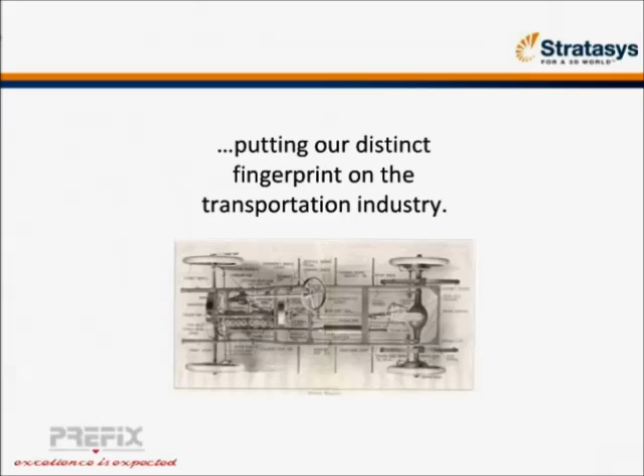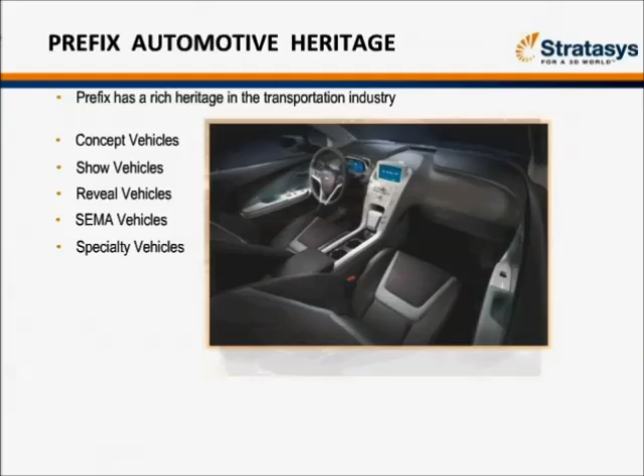With any growing business, you need to learn to adapt to the changing marketplace. For the past decade, we have been heavily involved in what is called subtractive manufacturing through the use of our 6 CNC machines. While this is still an integral part of our business, we found it very important to start entering the field of additive manufacturing through the use of a Connex 500 3D printer. We have numerous uses for this technology in our business that we plan on highlighting throughout our presentation.

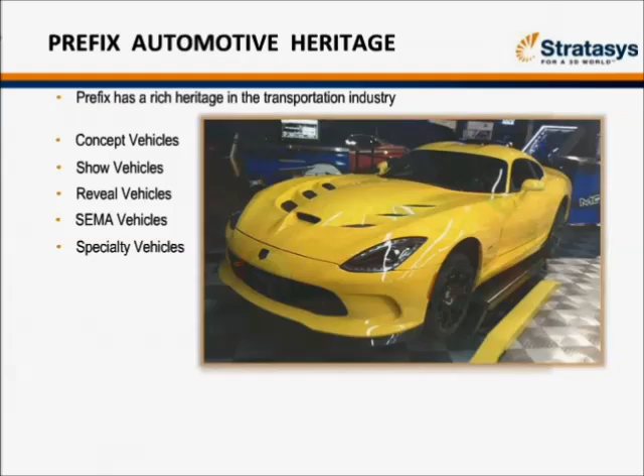We build a variety of models both inside and out, whether it be a new concept vehicle for the North American International Auto Show, an inside-outside show model for an OEM, or a new soon-to-be-released reveal vehicle. We also produce new fun and exciting properties for the annual Specialty Equipment Market Association show in Las Vegas, better known as SEMA.

This past year, we built a 2013 SRT Viper that showcased all of the available Mopar accessories for the car. This included exposed weave carbon fiber spoiler and splitters, carbon fiber interior accents, as well as new seat covers. This was all complemented with our heavy involvement in the SRT Viper program, where we paint all of the exterior body panels. We have also had experience in low-volume production specialty vehicles, such as the Pink Jeep Tour Trekker for Pink Jeep Tours out in Las Vegas.

We built passenger pods for 30 vehicles, as well as made modifications to an existing Dodge Ram pickup truck to make it look more like a Jeep with the traditional 7-slot grille. We have also recently expanded into aerospace through the creation of cockpit and fuselage interior mock-ups for both Gulfstream and Embraer.

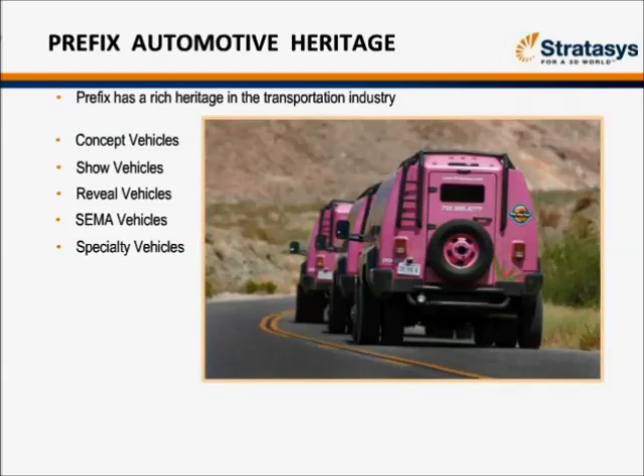While we have a wide variety of capabilities, one that has proven to have a very big wow factor is our interior trim. Back in 2004, we built a custom F-150 for the SEMA show that we badged the Everest. We did a full retrim of the interior, including leather seats, door panels, headliner, instrument panel, and Corian accents throughout. We also did a number of exterior modifications that truly made this truck resemble the luxury automobile market. This vehicle won Best of Show at SEMA that year and really helped catapult us into this type of show quality work.

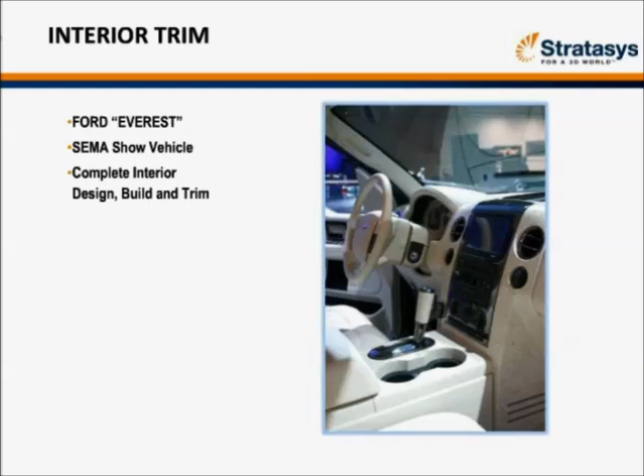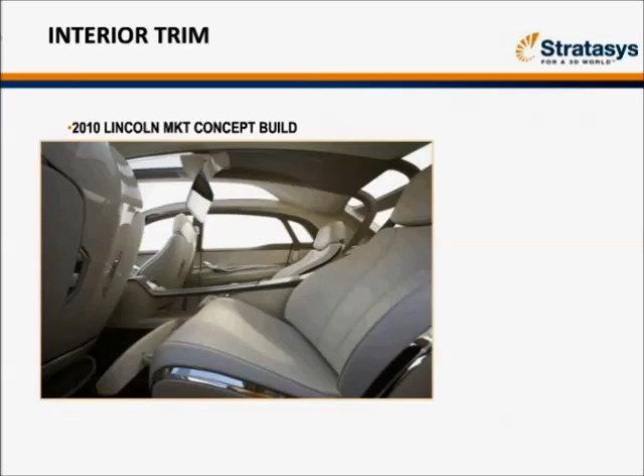Next is the MKT concept car build that we did for the 2008 North American International Auto Show. This vehicle eventually made it into production in 2010. This vehicle was built from the ground up, starting with the driving chassis here at Prefix. This model included some of the highest grade materials, including a banana silk carpet that cost $500 a square foot.

To this day, many people in the industry consider this one of the nicest concept cars ever built.

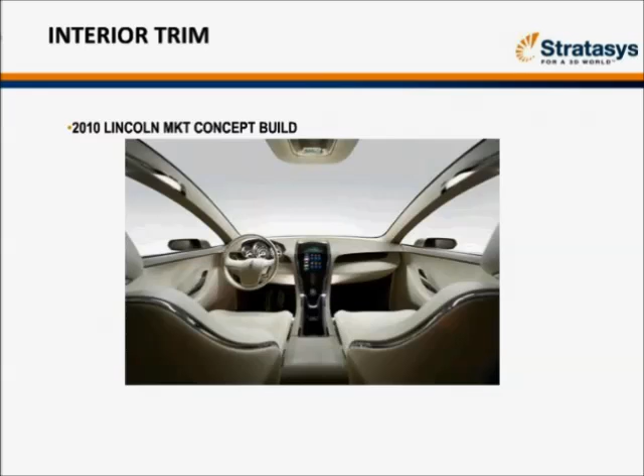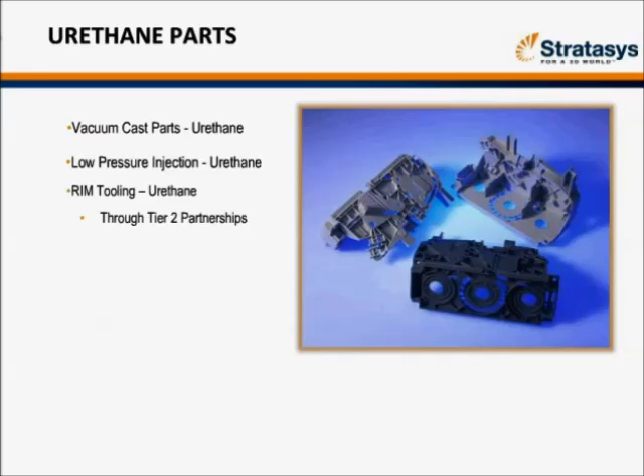Many of the parts that come off of our 3D printer end up being molded in silicone and get cast as urethane parts. We take our 3D printed part, surface it, and pour a silicone mold. Once the mold has cured, we can cast urethane parts in any color imaginable, though most are done clear or red, representative of most headlights and taillights.

We then have to put the casted part that is in the mold into a low-pressure vacuum chamber. This helps to remove any air pockets in the part.

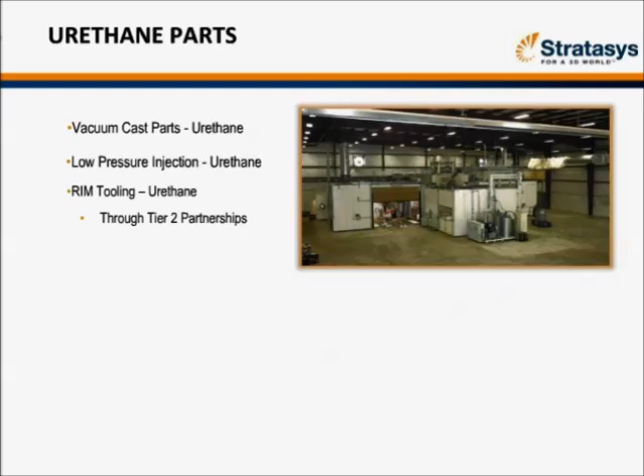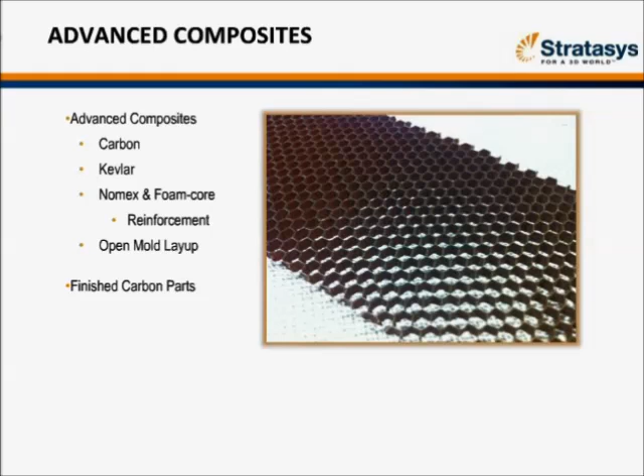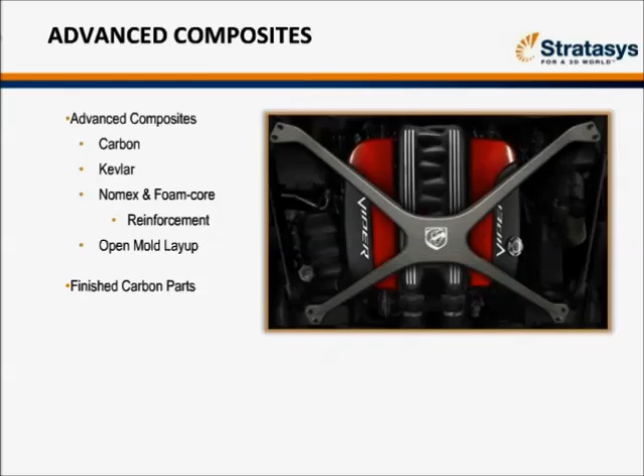When building a prototype, it is often necessary to machine a mold for us to lay up a part that could be any number of materials, including fiberglass and carbon fiber. Most fiberglass work is done through what is called an open layup, where you apply a surface coat to the mold, lay in the fiberglass with the resin, and allow it to cure overnight. You are then able to pop the part out of the mold, trim as necessary, and start the prep work on the part. With the advancements of technology today, the use of carbon fiber is becoming more and more popular, and certain processes have allowed it to be easier and more cost-effective than in the past.

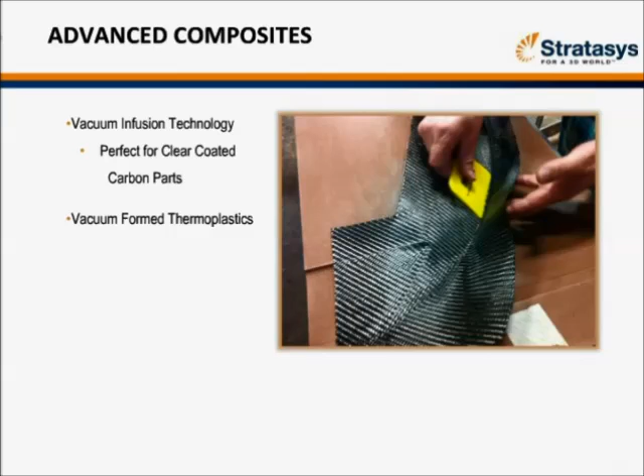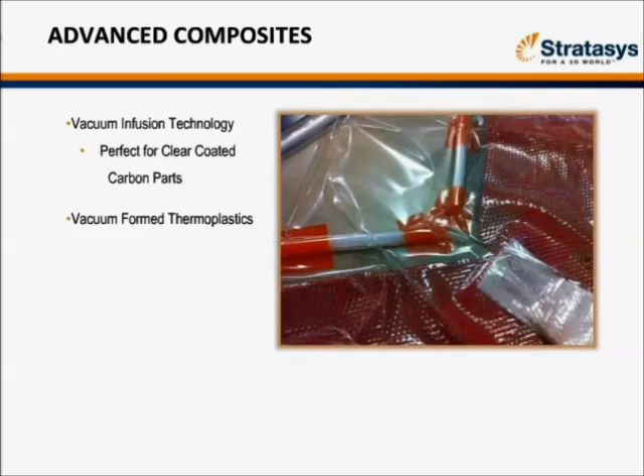If the requirement exists in production, there comes a need to represent it in prototype as well. If the desire is to show the exposed cloth weave of the carbon fiber, we use a vacuum infusion process where you lay the cloth in dry and then suck the resin into the mold through a vacuum system. You are then left with a beautiful part that you can clear coat before installation onto the vehicle.

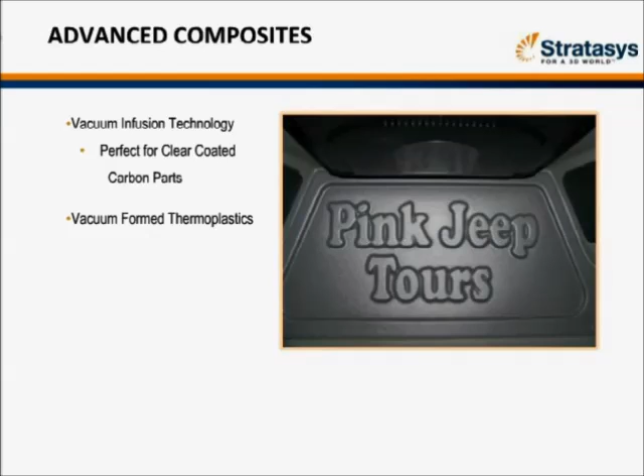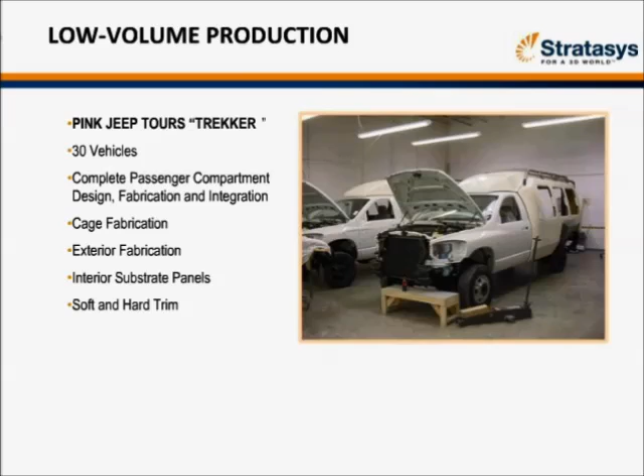As previously mentioned, we built 30 tour trekkers for Pink Jeep Tours in Las Vegas. We were responsible for complete design, cage fabrication, pod creation, mounting, painting, interior trim, and final assembly of each and every vehicle. After nearly 5 years of service, these vehicles are still in use.

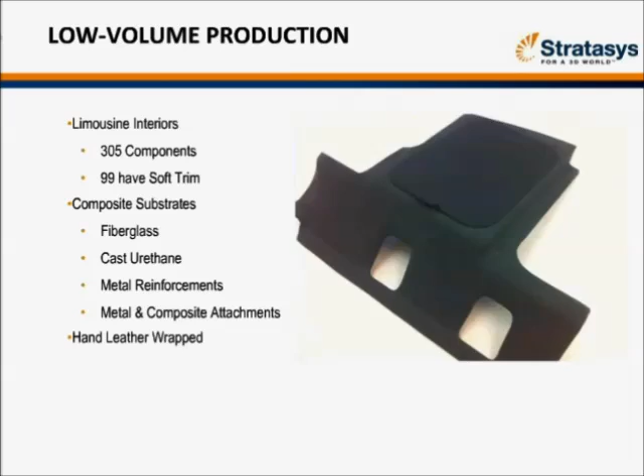We have also had involvement with custom limo interiors that involved the fabrication of fiberglass parts and cast urethane parts, many of which were fully leather wrapped. Many of the panels even included hand-picked, machined, and treated walnut.

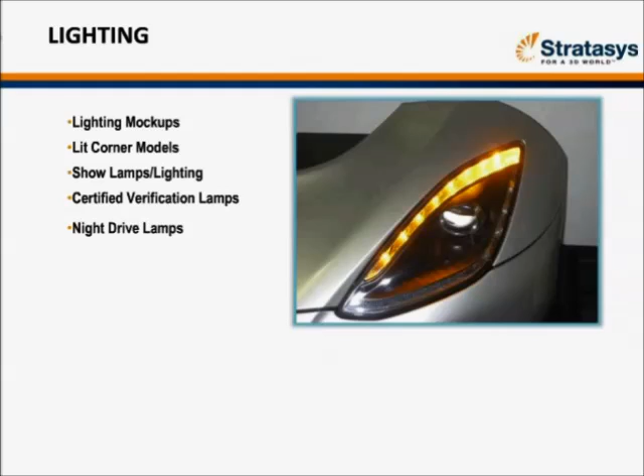Our biggest need for the 3D printer exists in our lighting department. We are a leader in prototype lighting creation and are well known for our attention to detail, as well as our trademark lighting controller. We can build anything from lighting mock-ups, lit corner models, show lamps including interior lighting, certified verification lamps, and night drive lamps. Each of these lamps has a very unique and specific function and requirement.

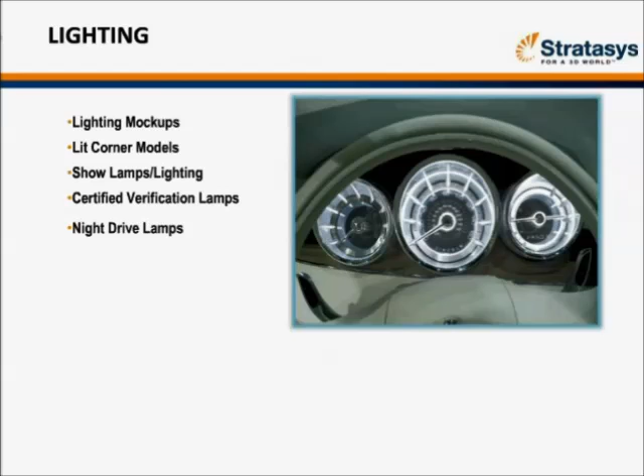Another type of model that we build a lot of are verification models. These can be both interior or exterior models, as well as smaller corner models. Typically, most of the parts of these types of models are machined out of a machining board. However, many parts, due to their size and detail, need to be grown parts, and this is where we get heavy use out of our 3D printer.

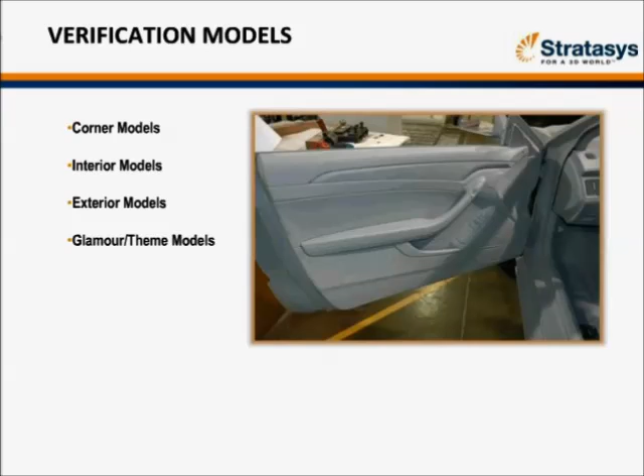Many switches, buttons, handles, etc. may have extensive detail and or be too fragile to machine. Objet provides us the flexibility to create these parts with the necessary detail without as large a risk of breakage or loss of accuracy.

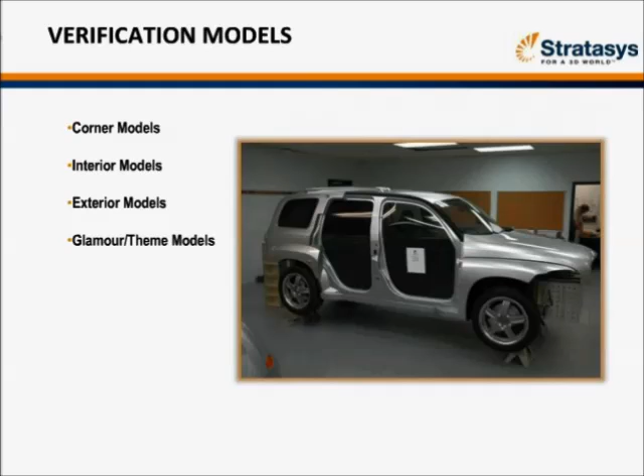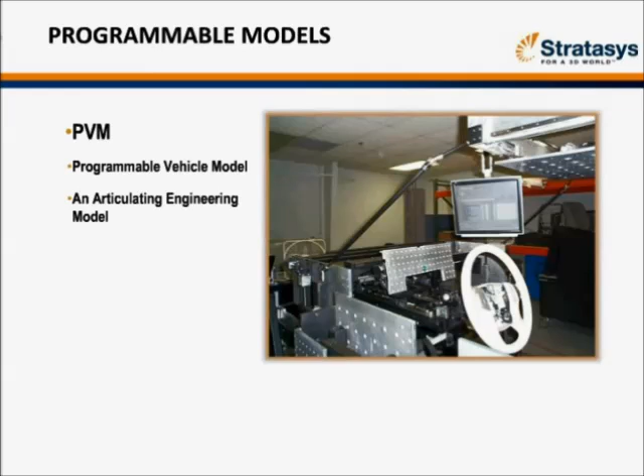Many years ago, we patented what is called a programmable vehicle model, or PVM. For nearly 2 decades, we built these for companies such as Ford, Chrysler, GM, Toyota, and Hyundai to help support customer clinics, where they could assess a wide variety of likes and dislikes from a customer perspective by allowing them to move electronically any of the panels within the vehicle.

You could adjust the seat height, move the instrument panel closer, door panel higher, and roof lower in order to reach your optimal ergonomic environment. This information was then all stored in a database to be studied in greater detail upon completion of the clinic.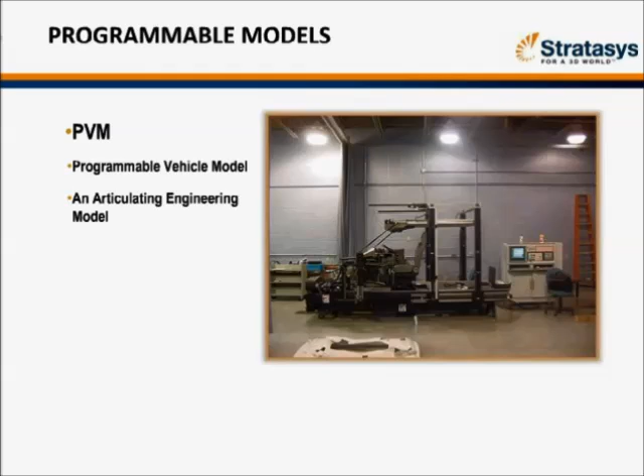We also offer additional program support by use of our FARO laser scanning arm that helps us validate if the parts we machined or grew are to the required build tolerance requested by our customer. We can also do the necessary seat point checks to ensure that the interior seating environment is within spec.

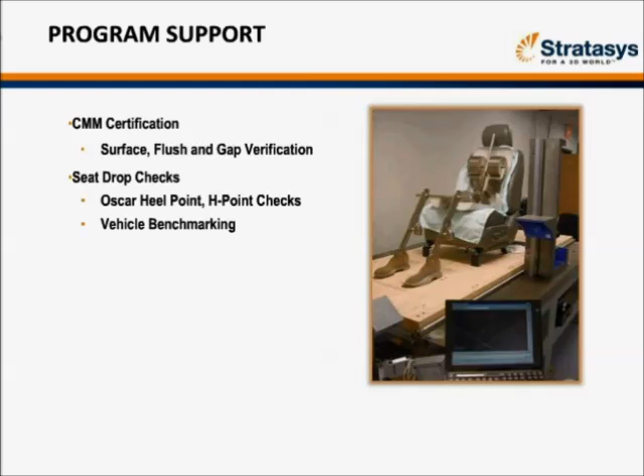Last year, we embarked on a very exciting opportunity to paint the entire SRT Viper in production. We acquired a 130,000 square foot abandoned Kmart, completely renovated it, and turned it into a state-of-the-art facility full of 6 brand new paint booths and all of the necessary equipment to process the nicest paint finish on any vehicle in the world. Every panel is hand-prepped, painted, wet-sanded, and polished before shipping down to the Conner Avenue assembly plant in Detroit, Michigan, where it is built.

We are incredibly proud of our involvement in the SRT Viper program and helping to make this vehicle a success.

Last December, we made our first visit to our local Stratasys sales office to see a demonstration of the Connex 500 in action. We were immediately impressed with the ease of use and quality of parts that were produced. Based on our experience with outsourcing rapid prototype components in the past, we knew how much use we could get out of our own machine.

We did an in-depth financial analysis to determine our potential success. It became clear that purchasing our own machine was the right decision. On January 21st, we officially purchased our machine. During the next month, we did the necessary site preparation, awaiting the arrival of our machine on February 22nd. Based on our internal workload, we knew that we needed to be ready to go right out of the gate. We had an extensive backlog of parts ready to go on our very first day. On February 27th, we launched our first table, and we never looked back.

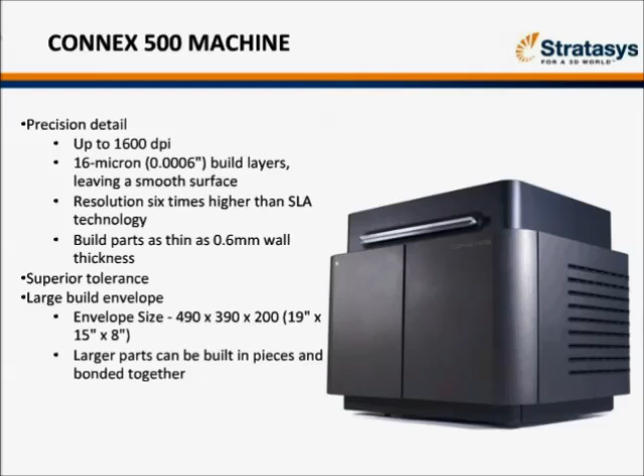In our business, we have multiple projects going on at the same time, run by 6 or 7 different project managers. In order to manage the large number of requests coming from multiple people, we developed a software program database that helps organize all of the part submissions. Project managers are required to submit specifications such as part quantity, due date, material, detail level, and part data.

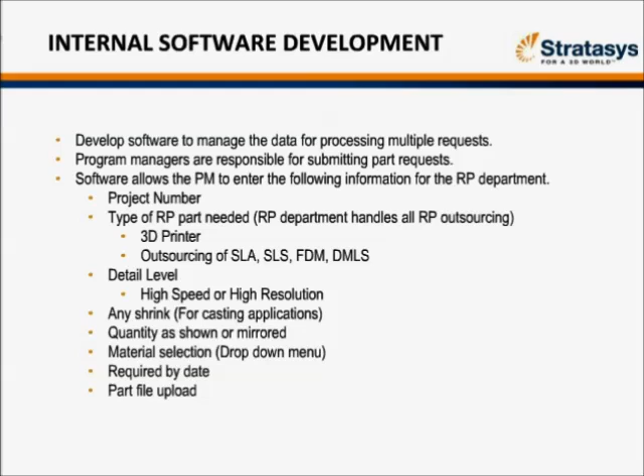This is an example of our user interface for performing part submissions. We have come to realize that without the ability to organize the massive number of part submissions, we never would have been able to be as efficient as we are.

Through the user interface of the complete part submission list, our rapid prototype department is able to sort the results by a variety of categories, including due date, speed requirements, material specifications, project number, etc. This helps to assure that everyone's requests are met.

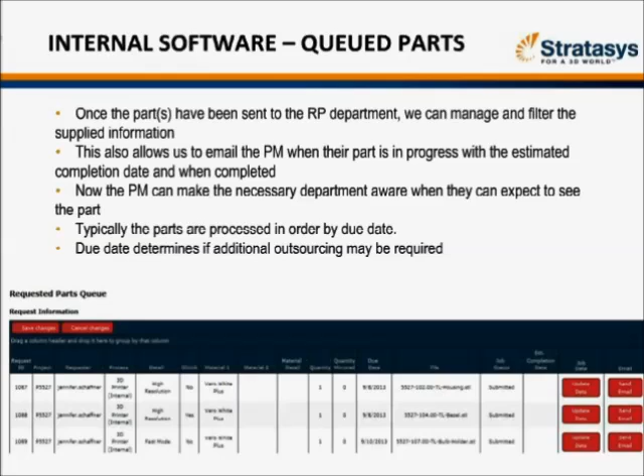In order to be as efficient as possible, there are a number of key procedures that must be in place. First and foremost, it is essential that we have the next table built and ready to go before the completion of the current platform. That way, as soon as the platform ends, we only have to pull the parts, clean the print heads, and start up the next platform. The turnaround time for this is only 15 to 20 minutes.

We have a highly dedicated team that helps support each other to assure that no matter when a platform ends, someone will be available to help get the next platform started. Whether it is 7 p.m. on a Friday, 11 p.m. on a Sunday, or New Year's Day, if we have a platform ready to go, we make sure the machine is running. During our first few months of use, we have operated at 92% efficiency, meaning the machine was running on average just over 22 hours per day. The majority of our downtime was from changing from one platform to the next.

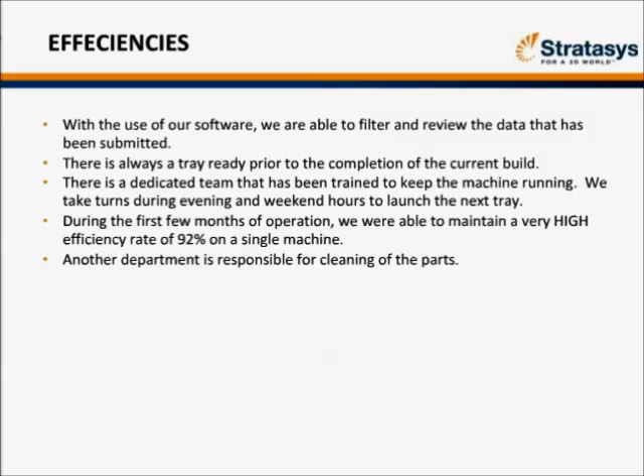As I mentioned previously, the biggest impact of our 3D printer is to our lighting department. Our 3D printed parts are used as our masters to make urethane lenses from a silicone mold. Parts are benched in order to have the highest finish level possible before being molded. Whether the part itself is used in the lamp or the casted urethane part, there are a variety of finishes we can incorporate into the part, including metallization, paint, and graining.

Most of our properties are fully functional with an electronic controller unit that our customers can assess for the first time what their design looks like in real life.

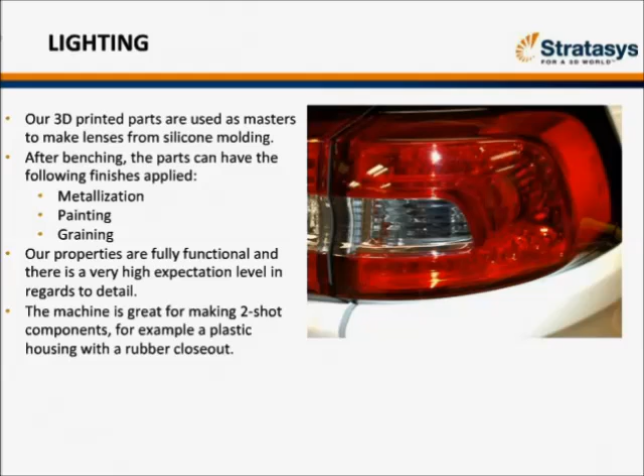We also have a variety of uses on interior properties, such as the one shown. This model was an early run at the 2013 SRT Viper interior. Oftentimes, the components are either too small or too detailed to be able to provide a machined part. In these instances, we rely heavily on our 3D printer to produce these components. These components can be grained, painted, metallized, or wrapped with soft trim.

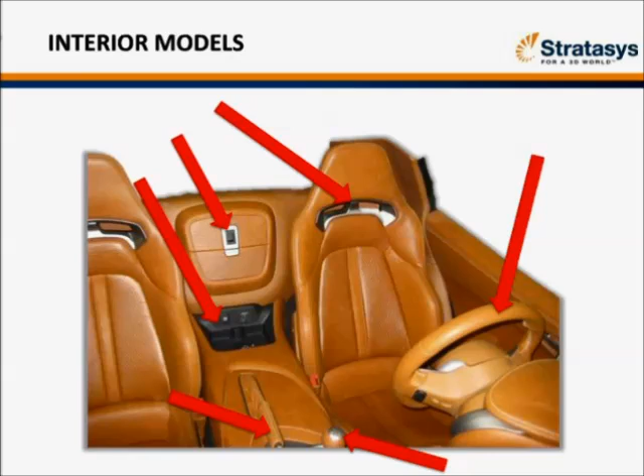The use of our 3D printer has provided additional benefits due to its high level of detail. We have been able to reduce our overall bench time or sanding time by as much as 20%.

As of September 7th, we had put over 4,000 hours on our machine, which puts us on pace to achieve 8,000 hours for the year. To put in perspective, there are 8,760 hours in an entire year, which would keep us at 92% efficiency. This is roughly 2.5 times that of a standard high-end user.

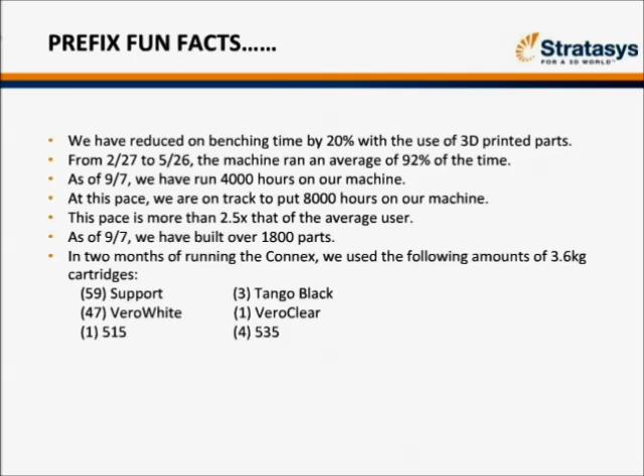In that same time frame, we have built over 1,800 parts and used 115 cartridges. We'd like to thank Stratasys for all of their support over our first 6 months of operation and helping us to be as efficient as we've been.

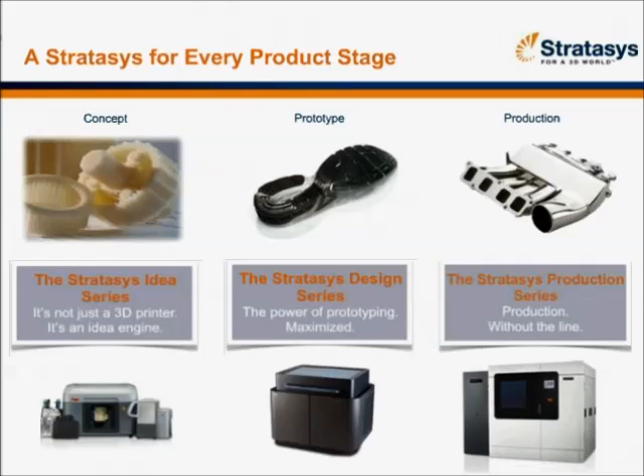The use of Stratasys technology in the rapid prototyping or additive manufacturing industry is truly creating new options for companies and individuals, such as what we heard at Prefix, but it's creating new opportunities on how things are made, how people and teams work, and directly impacting lives through such things as custom prosthetics, for example.

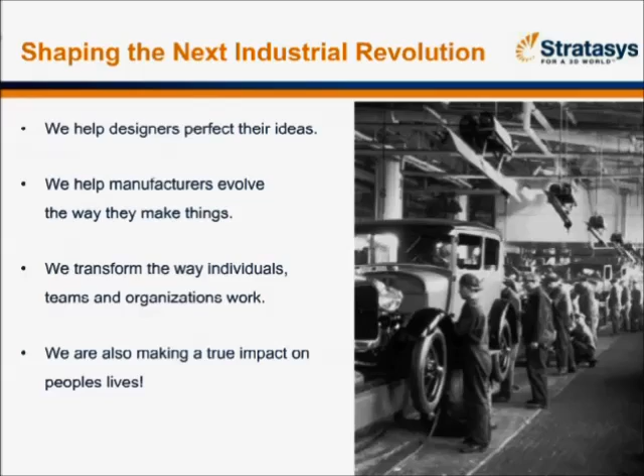So we hear phrases such as rapid prototyping, 3D printing, additive manufacturing. These changes in the naming are all valid, but it's all grown as the industry has grown and as the applications have grown.

So the success of 3D printing does not lie in the replacement of traditional manufacturing methods, but rather as an enhanced enabling technology that plays an exciting role in modifying consumer behavior as far as helping bridge ideas to life and expanding manufacturing offerings.

Fundamentally, we believe that 3D printing is changing the world of product development and manufacturing and creating new opportunities and applications.

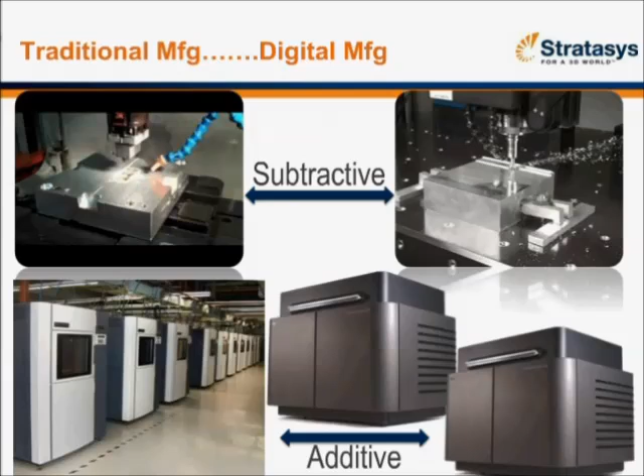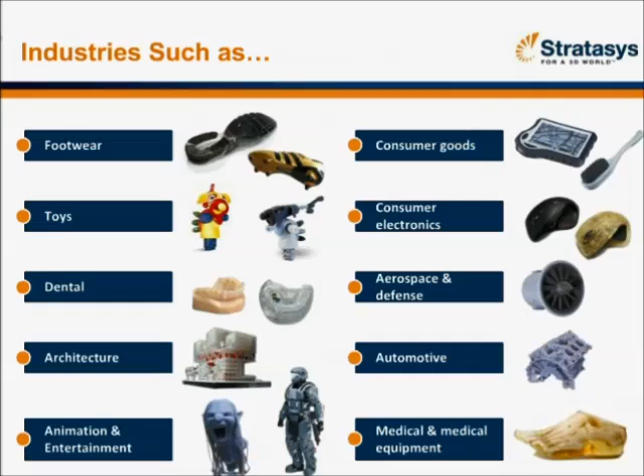So I'm really calling it a 3D printing revolution. The reason being is not only are we seeing the expansion into many different applications and industries, but it's starting to become mainstream.

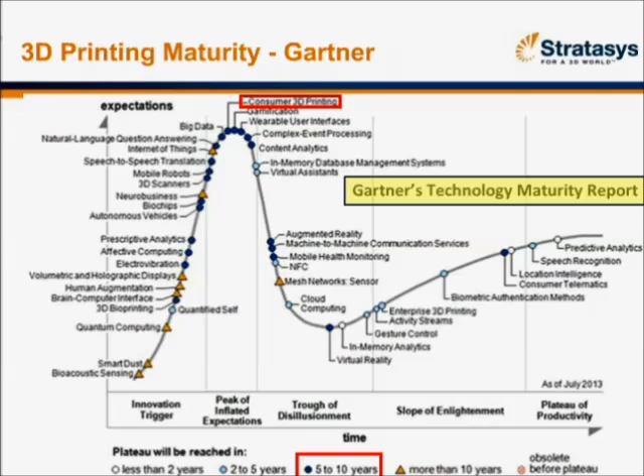So if you look at the Gartner Technology Maturity Report, you can see at the very top I've outlined or highlighted the consumer 3D products or printers at the very top of the peak there. This indicates that within 5 to 10 years, 3D printing or additive manufacturing is going to be considered mainstream in the way that we do things.

So as we heard with Eric's presentation, composite materials are used in aerospace, automotive, sporting goods, and consumer goods because their strength to weight ratio exceeds any other known materials.

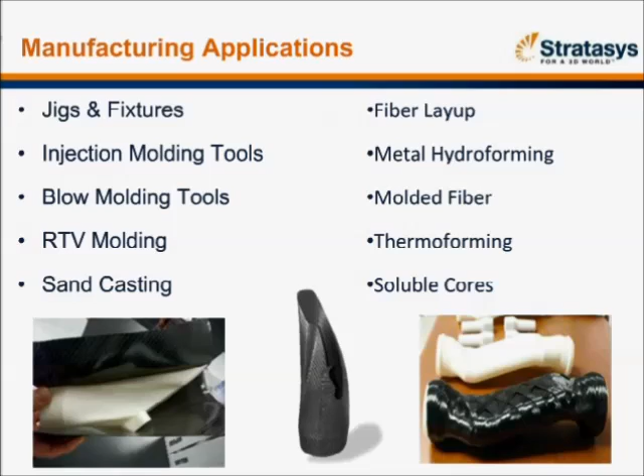Another manufacturing application that lends itself well to either FDM or PolyJet is jigs and fixtures, which are production tools used to accurately manufacture, duplicate, and interchange parts. They can also be used for external components to facilitate handling, calibration, and simulations of specific actions.

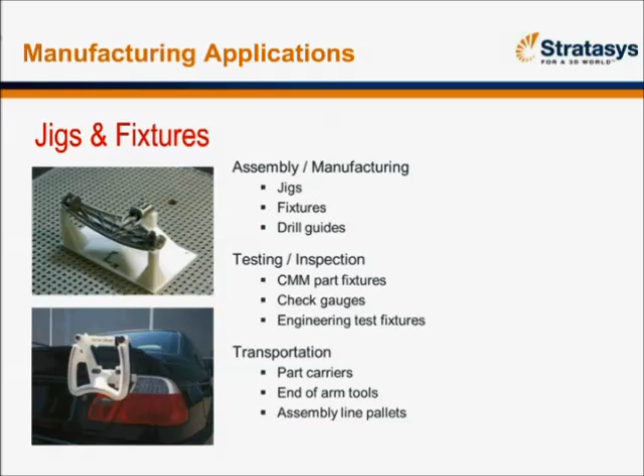FDM parts can be sparse-filled on the inside, making them lighter in weight, and because they're true thermoplastics, they're incredibly durable, which makes them perfect for this application. Some areas that benefit from FDM jigs and fixtures are ergonomics, such as technician comfort and ease of use, easy access and storage, custom design, and you can revise parts as needed. It's a streamlined process, not having to create detailed drawings for the jig and fixture.

Additionally, one of the more popular applications today, growing among our customers, is creating digital ABS injection molding tools. If the over 130 materials we offer don't provide the material properties you're looking for, you can simply create an injection molding tool to produce a short number of final production injection molded parts. PolyJet lends itself well for this process, and you can see some examples here with intricate detailing.

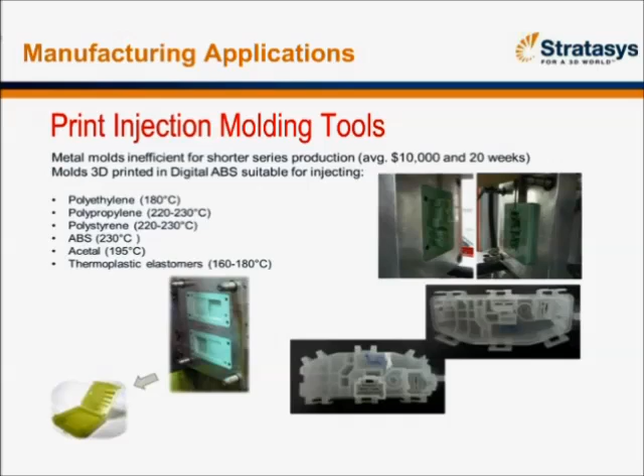When we dive into the core technology behind Stratasys, the first I'll talk about is PolyJet. PolyJet is all about jetting thin layers of material down to 16 microns of acrylic-based photopolymers. That's what allows us to create parts with fine details, smooth surface finishes, and accuracy by jetting two materials at the same time.

We also enjoy the FDM technology with its true thermoplastics that are deposited—this is not about simulated or first-generation plastics, this is about true thermoplastic. It's filament material advanced up to the extrusion head, heated and extruded out at 7 or 10 thousandths of a layer, for instance, to create a robust part. Both technologies are complementary and mainstream in engineering prototyping, but also product development and additive manufacturing processes.

To take a closer look at what's possible, what I call the fuel, let's look at the PolyJet photopolymer materials first: rigid, opaque, clear, transparent, high temperature, digital ABS. Next, there's flexible materials, which provide an array of shore values just from the base material. We also have medical-grade materials that are biocompatible for dental and hearing aids, carrying ISO 10993 and USP Class 6 certification. This is a strong offering.

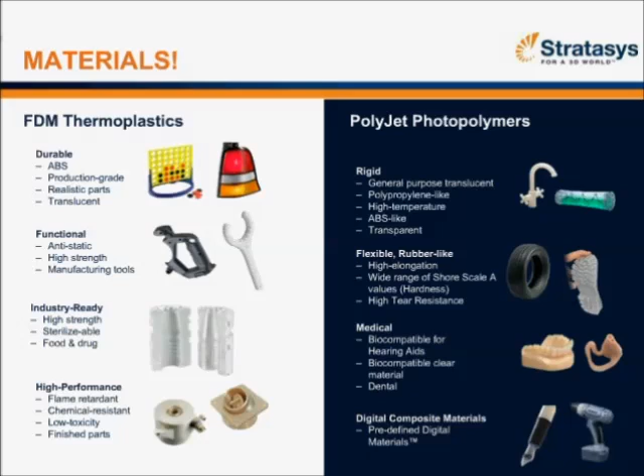So now let's look at the plastic pyramid. Here you can see the different categories: on the very bottom is represented the standard plastics, in the middle is engineering grade, and at the top is high performance plastics.

Today, annual consumption of plastics, believe it or not, is at 300 million tons, and looking back to 1950, the annual consumption of plastics was at 5 million tons. Now we're talking about 17,000 different types of plastics that make up this usage. So plastics is definitely a success story in and of itself. As you see in this pyramid, as you go up, the higher performance tier has greater thermal, mechanical, and toughness properties. This really has been our roadmap, and plastics is just growing beyond belief.

So this roadmap gives us the direction for material development, which we're always striving to get greater overall properties across each of our platforms. Up at the top of the pyramid, we see the high performance offered by Ultem, and in the middle the polycarbonate falls, as well as the digital ABS and all of the others in the standard plastics category. So it's a good offering of materials, well balanced.

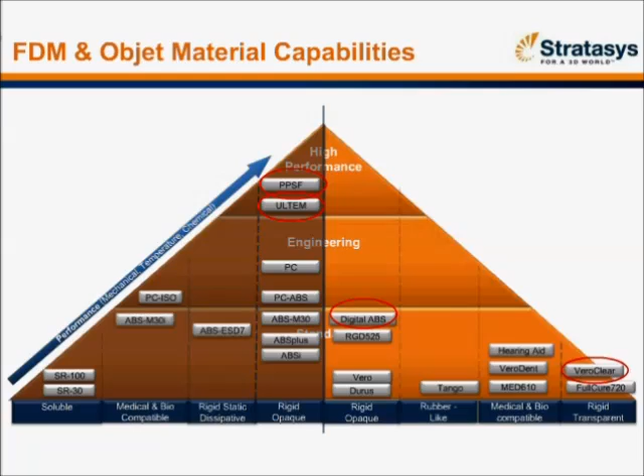Now this is the thermoplastics broken down specifically for the FDM side. I've circled the PPSF and the Ultem. The Ultem has an FST rating, so flame, smoke, and toxicity, which lends itself well for some higher temperature applications. And the PPSF is chemically resistant to gasoline, motor oil, and transmission fluid, for example, and there's a whole laundry list of things that it's resistant to. So these are the two, as well as many others listed here, but these two I'd like to point out specifically for the automotive industry.

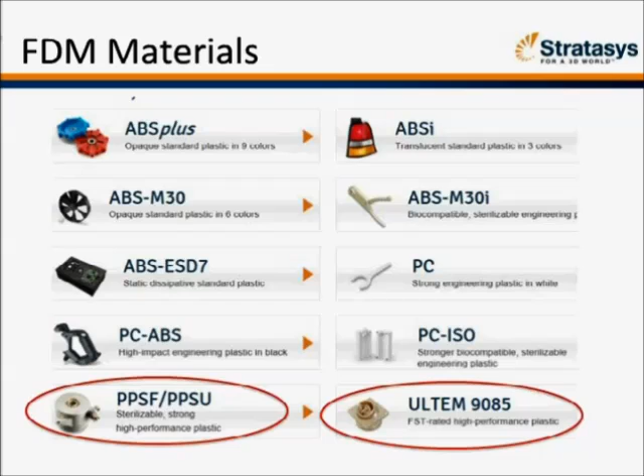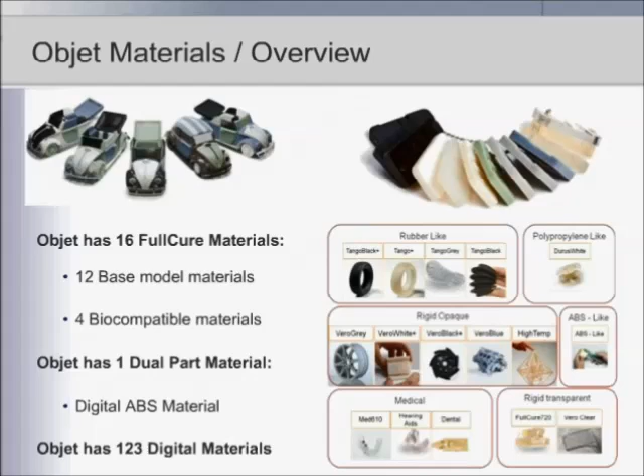So on the Objet materials, we heard Eric talk about going into some of the specific applications he's using it for, such as lenses. But right now with the PolyJet base materials, we can offer many different base materials, going from rubber-like to polypropylene-like, as well as getting into more rigid materials and then those medical-grade materials. And that's all before we talk about the digital materials, which once you add those in, the Objet technology offers 123 different material opportunities.

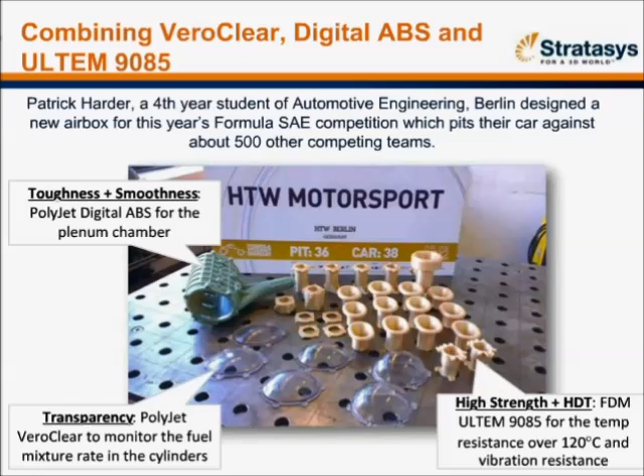So once again, the Ultem material was used - that's the gold material you see there. It was used for the airbox for the high temperature resistance, at 120 C, and vibration resistance were also required here, so Ultem was the perfect choice. Meanwhile, the digital ABS is what you see in green. This was used for the plenum chamber, where the airbox requires a combination of toughness and a unique geometry for its high surface finish. In addition, the VeroClear transparent material was used to create a small oval window to see inside the airbox. So it's a good example of both technologies at work.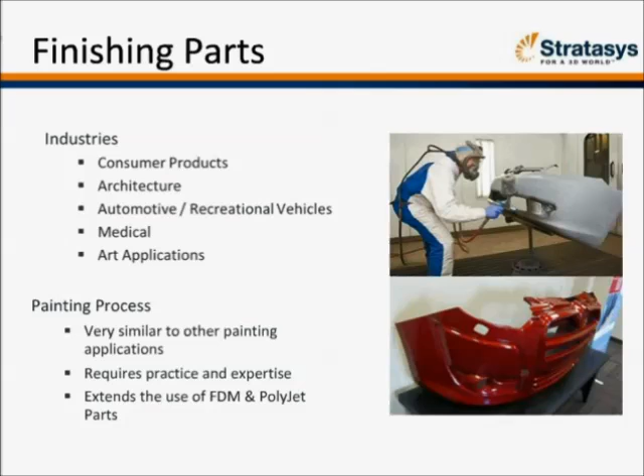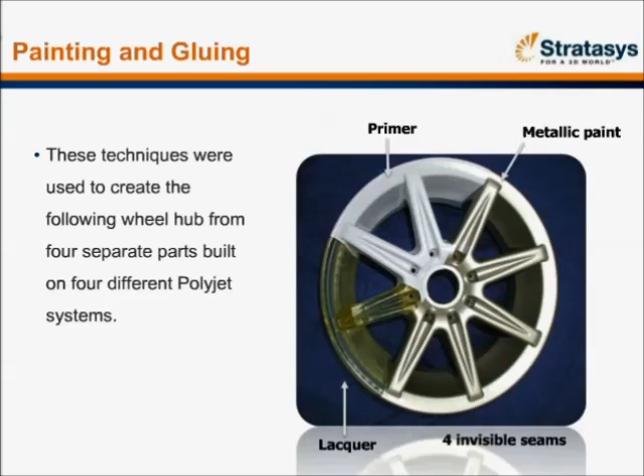Here's an example of an Objet part that has been glued together, so there's 4 different areas - one's been lacquered, the next primered, the next plated. So you can see this is a really nice example of the different finishing levels you can create. Painting and gluing is easily done, as obviously demonstrated in the last hubcap example, or rim.

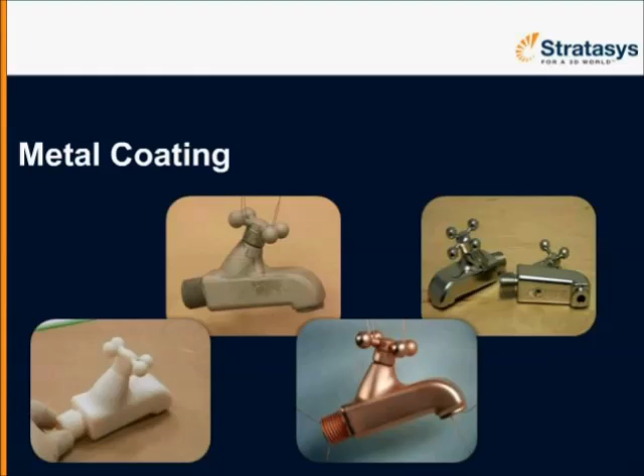Metal coating is also frequently done with all of our materials, so we have tech guides on that to help you be successful in that application. In this particular case, it is allowing this customer to not only create a more aesthetically pleasing part for showroom quality, but it's actually functional - creating a stronger, higher application or tough part where it can actually be utilized for the application it was intended for.

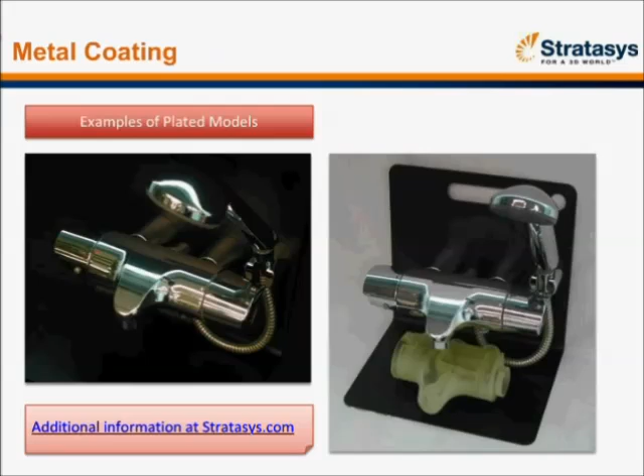So Eric talked about the Connex system. I've made reference to digital materials, and I want to talk about that a little bit further, because some people understand the concept, but it's a little difficult to fully grasp the fact that you can create 123 different material options from this technology.

So digital materials is really a composite, and composites have always existed. You look at adding straw to mud - that idea is to create a stronger wall. You add rebar into concrete construction.

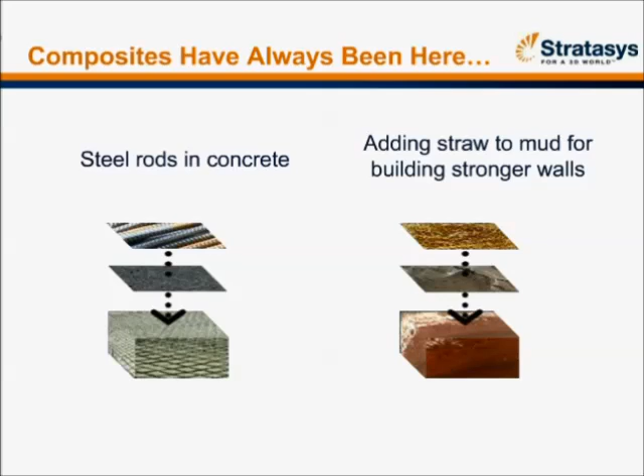That's going to create a stronger structural result for the building. So how do we create digital materials? This is all about an algorithm, all about software. Digital materials do not exist in a cartridge, but rather are composed by the software.

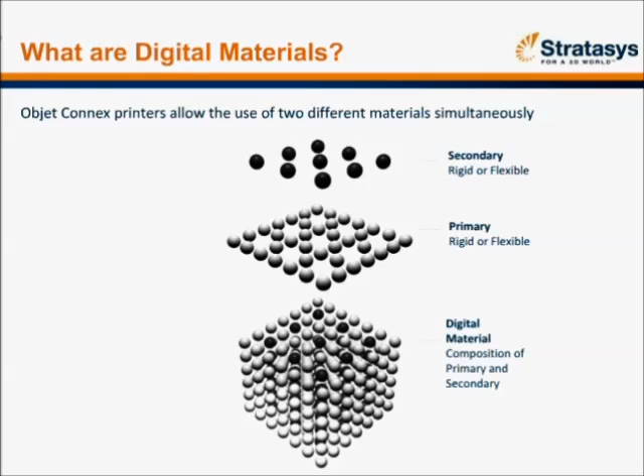Here we see a primary material, denoted with some of the dot matrix that you see, being composed by the software. Then we can see a secondary material, which is either rigid or flexible. The two different materials create a new composition that has new attributes - it's actually taking two different materials and creating a new material.

So on the Connex platform, for instance, you can produce a mixed tray just with white or black, for example, which is what you're seeing here. You can do rigid or rubber-like, transparent and opaque. It's all about a mixed tray, and two materials that are loaded does not require you to change the cartridge.

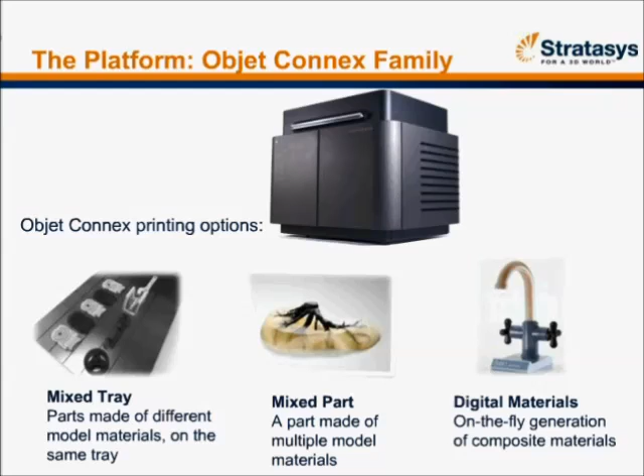Again, people have a hard time understanding this concept. So what helps to understand is, once again, that it doesn't start out in a cartridge. Digital materials are created from the cartridge-based materials and composed together to create that new material. It's not a homogeneous mixture - it's composed with the two base materials to create that next one on the fly.

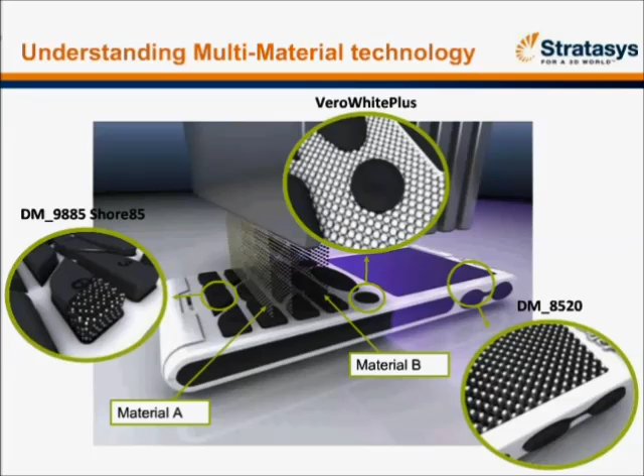So what does it look like if you build an entire 14-material part on the fly? What you're seeing here are different colors, but those different colors are denoting a different material characteristic. If you look closely, you can see different shore values being called out, different elongation-to-break properties. So depending on what you're making and the type of material properties that you need, you can absolutely try to achieve this through the use of digital materials.

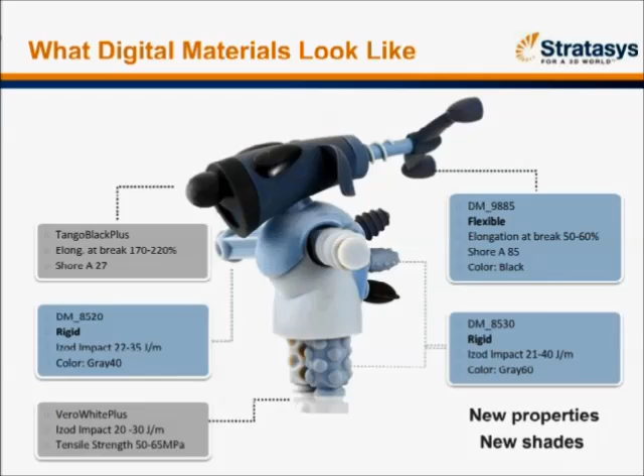So if I sum it up, it's all about two base materials that are helping us create twelve digital materials in one build - rubber-like and rigid, with all different properties in a single build. It's all about allowing you to create a wide variety of products and to provide you everything from rigid parts to soft touch and everything in between.

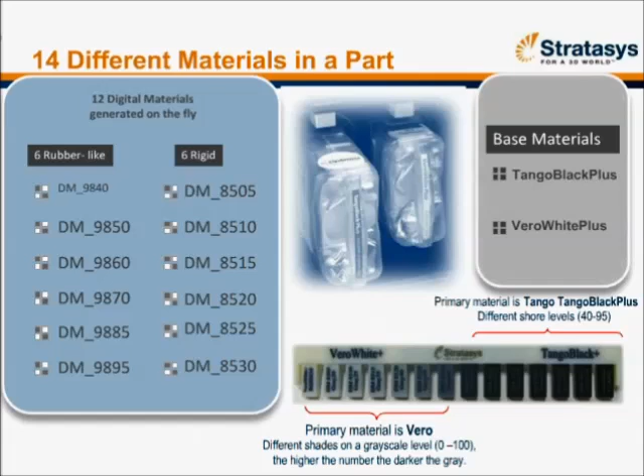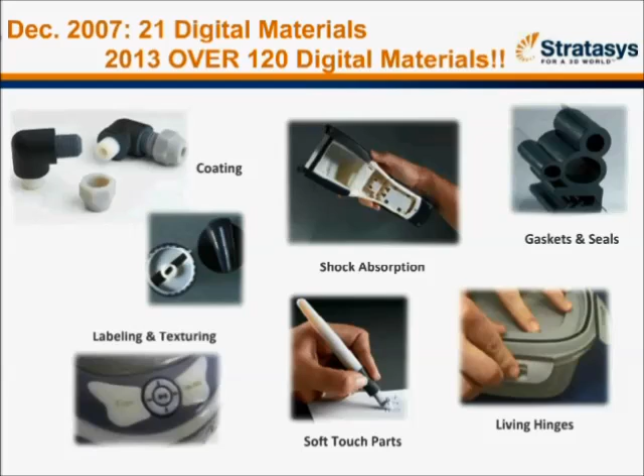So the 3D revolution is really happening now. The reason why I say that is not only from the Gartner Technology Report, but also the fact that governments are now accepting the idea that 3D printing is an economic driver. For instance, the Obama administration pledged funding of $30 million to the National Additive Manufacturing Innovation Institute.

The European government is also investing in this area. So looking forward, the solution will require educating and qualifying a new generation of engineers. And that's really what's happening here - we are all realizing what an economic driver this is and how it's affecting the different industries.

So to sum everything up, I know I've shared a lot with you. Rapid prototyping really started all about the fit, form, and function of design. Taking that forward, it went into design verification. And through the growth of enhanced materials, this has allowed our customers to start utilizing the printed parts in a manner in which it needs a lot of strength, so now they can actually verify that design.

Additionally, for end-use parts, the use of Ultem, for instance, in the aircraft industry, because of its FST certification, means they can create end parts in the aircraft itself. Custom prosthetic limbs can also be created because they're strong and lightweight.